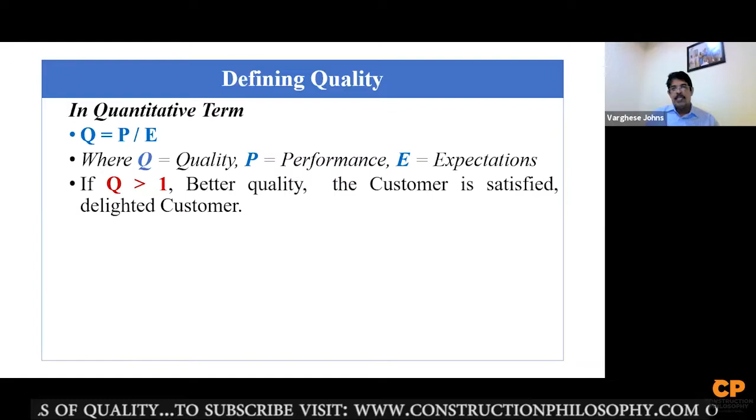In a quantitative term, this slide I showed last time also, just to remind everybody -- I'm showing it again -- the quantitative term Q is equal to P by E. Quality means performance over expectations. We can have a mathematical model defined like this way. So Q more than one means better quality, because your performance is always better than the expectation. And the other way, if quality is less than one, the customer is not satisfied. P and E are performance and expectation, determined by the organization and the customer.

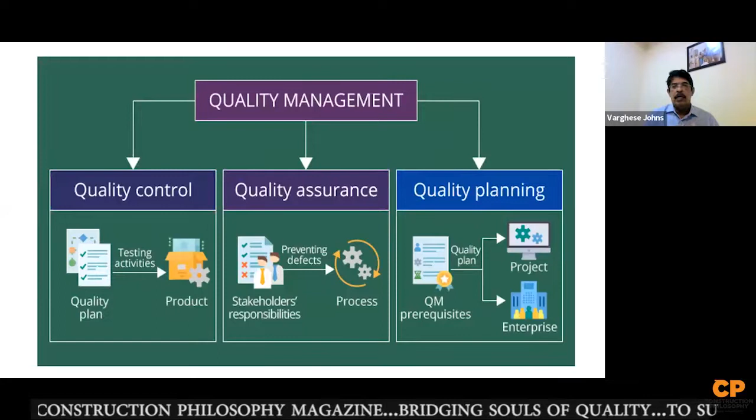If you say quality assurance, it is preventing defects. What is the objective of quality assurance? We set standards to eliminate defects. And who is responsible? The stakeholders -- the parties involved, the company, the subcontractors, the material provider, the consultant -- whoever is associated with a project, a process, or a service, is actually responsible for the quality assurance, because we form the quality assurance manual or the requirements.

When it comes to quality control, that is the testing activities. The quality plan is prepared already during the quality assurance stage, and then your testing activities, that is inspection, normally of the product or services, whatever it is.

In the 2015 quality assurance standard, it is not only product, it is services also. So when it comes to an organization or project quality management, once a construction company or a manufacturing company is awarded a project, you can see that half above is actually the client and the management of quality, how it should go.

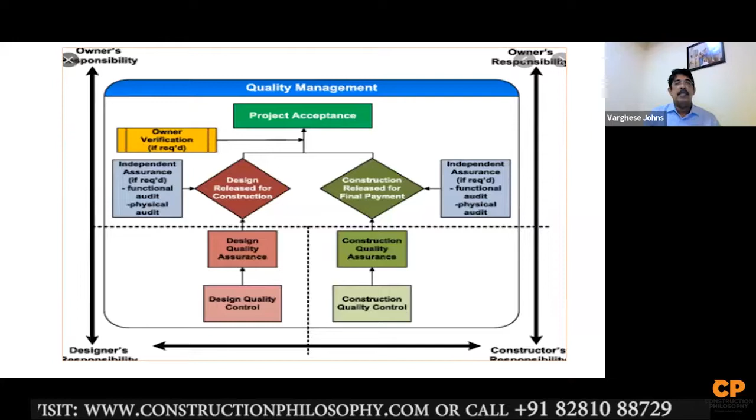They will appoint sometimes a third party quality assurance company to do the inspection and auditing time to time in the design stage, supported by another group. It will be another third party for design quality assurance and design quality control. Manuals and procedures are already formed that will be given to them. Then it goes to release for construction, then construction quality assurance, construction quality control.

There also, most of the time, a third party consultant is appointed, a specialist. Basically, they are more aware of how the quality system is implemented.

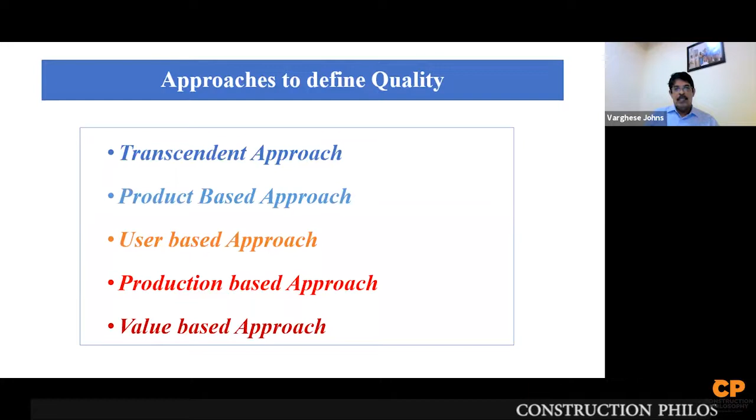Then approaches to quality. There are 5 types of approaches: transcendent approach, product-based approach, user-based approach, production-based approach, and value-based approach. These are the different types of approaches to define quality.

So let us see what is the transcendent approach. Quality is absolute and universally recognizable, because we always talk about quality every day, at least 10 times, because it is everywhere, quality exists, that is universally recognizable. The quality means when you see something, it's okay, it's a quality product. The sixth sense will give you a kind of clue that this is quality.

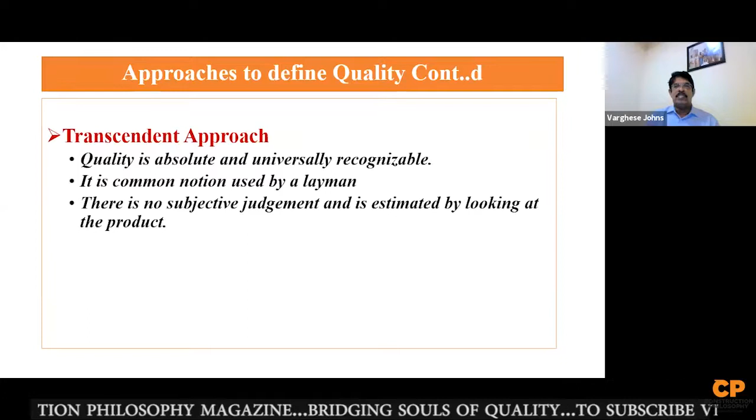And it is a common notion used by a layman, because everybody uses it. Every common person actually uses that, okay, it's quality stuff. There is no subjective judgment, and it is estimated by looking at the product, because it is not individual judgment, and anything which you cannot just estimate how much quality is this, it's always a comparison between one similar type to another similar type. But you don't need to be educated or more trained in making a judgment.

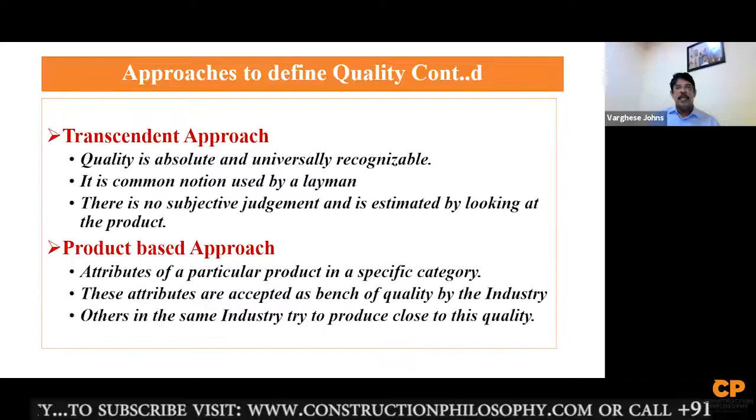Then product-based approach: attributes of a particular product in a specific category. Like manufacturing a car, the attributes of a particular product is a specific category. Because it's a car, it looks different in different models and different manufacturers, again, it's a car, but it looks different by different companies.

These attributes are accepted as a benchmark of quality by the industry. Even all the models, you can see that the quality is actually there, and each one has got a benchmark of quality for that product. Like you make a house, what is the basic function of a house? It will look different, but the basic functionality and other things are the same. So the benchmark for a house is rooms, living room, bedrooms, bathrooms—all that is the benchmark for a house, but it will have a quality difference in different ways.

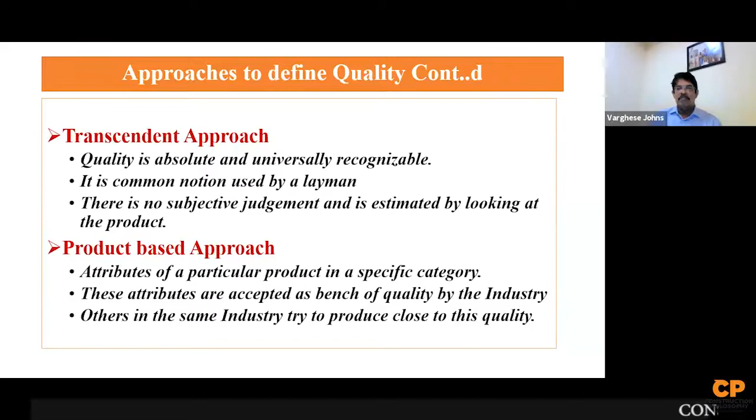Others in the same industry try to produce close to this quality. The same manufacturer or builder will make everything the same, but it will look different. And the quality is also actually maintained in making, but it's looking different, or maybe one quality is different, another quality is different, something like that.

Then user-based approach. User-based approach is defined as fitness for use, as we saw last time—fitness for purpose or use. A quality product is actually always fit for its purpose; that is basically the definition of quality. And it works, it gives you what you want, it is designed or manufactured for.

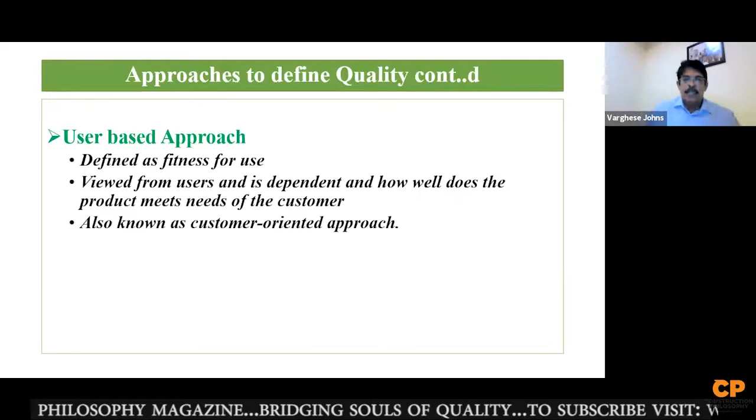Viewed from users, it is dependent on how well the product meets the needs of the customer. A customer always wants to buy something he wants, and he will give you certain specification requirements, and then he will look at the product or the process, or the end result. As a client, you will see that, oh, I want it this way, so that I am happy. The customer always expects it will serve certain functions, so that I am happy. This is also known as the customer-oriented approach.

Production-based approach: an outcome of engineering or operational excellence, and is measured in terms of quality or conformance.

If you are making a product, a house, or anything, the end of the day, you get some outcome, like you constructed your house or your project. So the operational excellence, if it is good and it is a quality thing, it is measured, the quality, or maybe the operational things are measured, and it is a quality or a conformance, conforming to what you wanted, or how it is functioning, how it is operating.

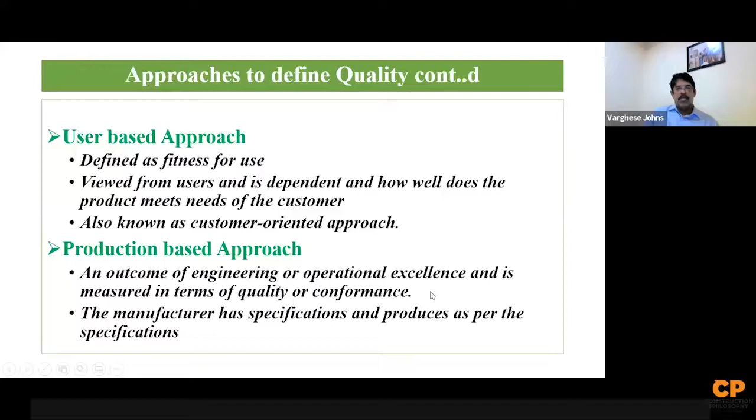The manufacturer has specifications and produces as per the specification. So there is always a specification set for a process, a product, or a construction. So you do it complying with the specification. That is also an approach of the production-based approach.

Then the value-based approach, values we see it in context of price. The same type of thing will not be the same price, but people spend money to buy sometimes bigger, expensive things, and they are happy and feel that it is a quality product. So it's a value-based approach, how you approach the product in terms of value.

Quality is satisfactory. It provides desired performance at an acceptable price. Sometimes people say, I got something for value for the money. So it is a satisfaction for each user, or the owner is going to have it.

Customer looks at the total value proposition and not the price alone. When you want to buy certain things, sometimes you like a certain product, but you don't give priority to price, or maybe you will sometimes sacrifice or compromise on the price. So it's a total value proposition - you buy it and say, okay, I don't mind paying for it. So value is equal to benefits over price. That is the same meaning as the definition we saw before.

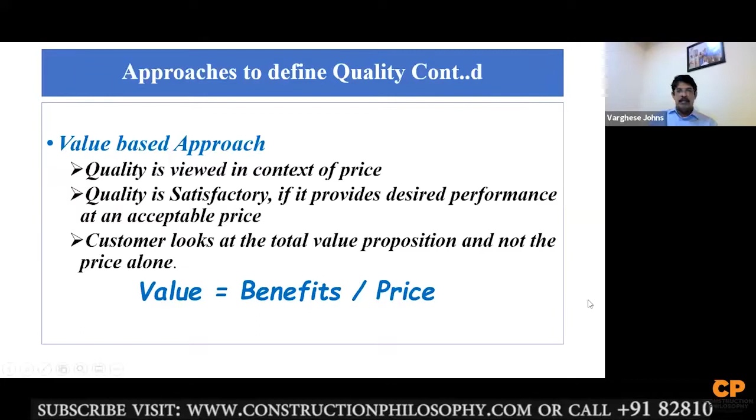Then the QAQC framework elements and manual, because every construction company's QAQC framework includes at least six elements. The following are the six elements you should include in your QAQC framework. This is a manual created by the company. Every organization will have this kind of manual. So what is the content of the manual: quality organization and management, the organizational structure of quality and management.

How you are actually doing, what is your plan for implementing quality - you need an organization, you need management, documented standards and specifications. So what is actually your reference, your benchmark to do the quality management? That is the standards - establish the standards as well as specifications. Sometimes the specification might change, it varies from project to project or product to product. But there has to be a manual which specifies this.

Formal qualifications and experience of employees - for a particular task, a structural engineer has to be employed for doing structural designs, so you cannot employ an environmental engineer for that. The right kind of talent has to be put in place. You have to document that these are the people going to engage in this particular kind of task or work. So you always employ the right kind of people with qualification and experience, because you cannot do a task without having enough experience on how it is done.

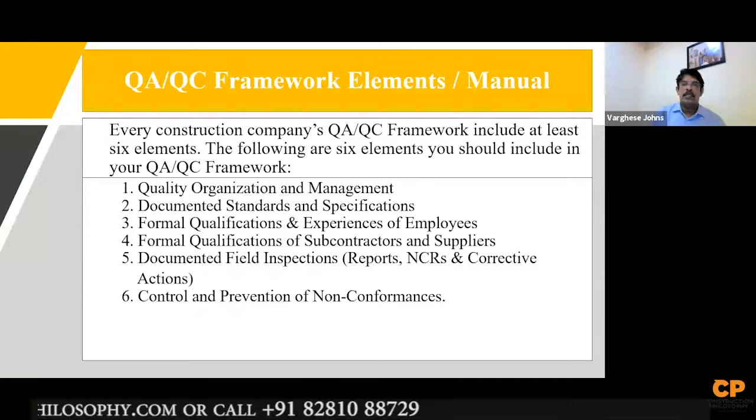Documented field inspections, reports, NCRs, and corrective actions. Quality control's function is to do field inspections and office and various department inspections. The process is also inspected using certain set standards and required specifications. So there are reports - how you prepare the reports - NCR, non-conformity reports, and corrective actions - what is the strategy for doing your corrective actions if you have an NCR.

Then control and prevention of non-conformance. The manual is actually created to state that - it is a proactive thing to prevent non-conformance, mistakes or errors.

So what you can do, because once you do many inspections of a project or a process, you will know by looking at it that these are the causes of this happening, so you can prevent it by having some kind of set procedure. Don't do it this way, do it that way, so that you get what you want.

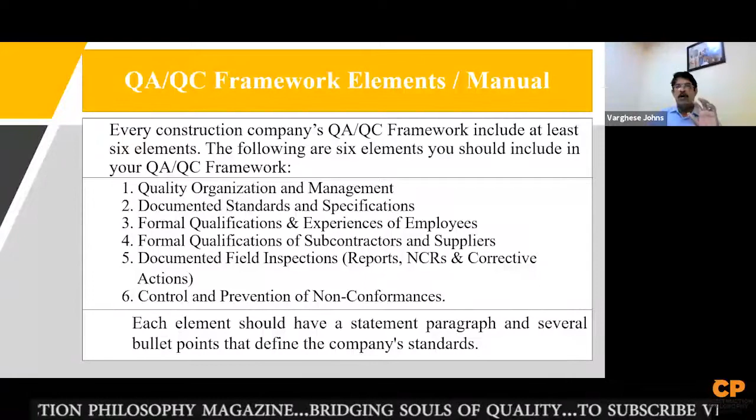Then each element should have a statement, paragraph, and bullet points that define the company standard, because it has to be prepared in a document kept for everybody to read and see what the framework elements of QA/QC are, and what manual the company wants - the policy of the company.

Then we come to comparing quality assurance and quality control. What is the meaning of quality assurance? It's a promise, belief, and confidence. Quality assurance is actually giving a kind of confidence to the people, or maybe the client or your customer, that we have a certain system established that will give - it is a promise, and that will improve the confidence of the buyer or the customer.

So here, quality control is to make or run in an order or within the limits. You have already given a promise, and your quality control people have to run in an order or within the limits specified in quality assurance.

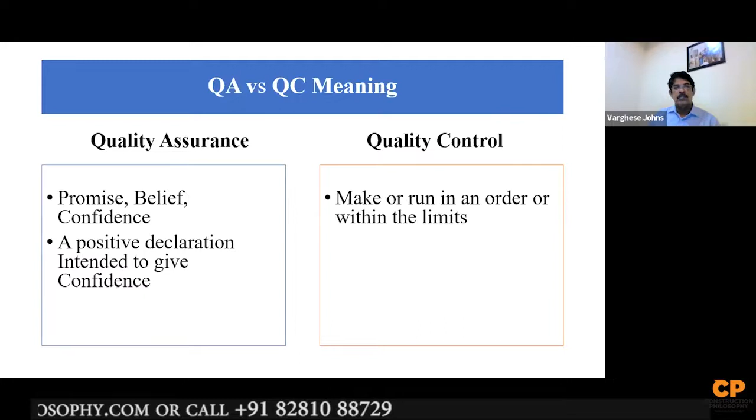A positive declaration intended to give confidence. You are giving a kind of positive declaration in advance that these are the things which we are going to give confidence on, because of this process or these procedures, which will definitely give confidence to the buyer or the customer.

So here, an ability to run something in an orderly way - because quality control is its ability to run within an orderly way, within the parameters specified in quality assurance, you are able to do it. That is what it means.

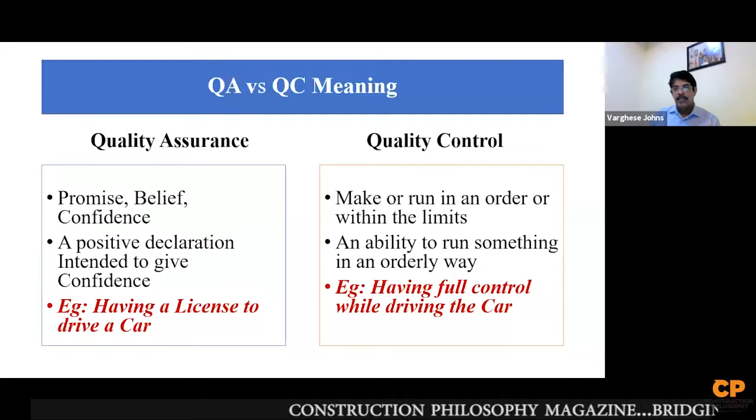So it is an example - what quality assurance means is having a license to drive a car. This is quality assurance, that you have gone for a test and got a license. But in quality control, it's having full control while driving the car. See the difference - that doesn't mean that even if you have the quality assurance, how do you drive the car? Can you believe, or can you do, the entire control of the car while driving? So that is the difference, explained in a small way.

So now the QA versus QC definition. What is actually QA, quality assurance? A part of quality management focused on providing confidence that quality requirements will be fulfilled - a quality management system, that is the basic content, same as giving confidence to the buyer. A part of quality management on fulfilling quality requirements. Here it is fulfilling, and there it is telling that these are the things which give confidence. And here you have to make sure that it is fulfilled.

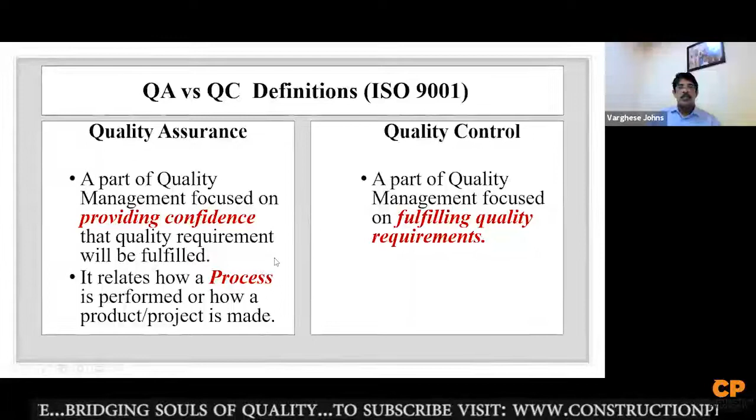So it relates to how a process is being performed, because quality assurance is a process, defining a process of how it should be. And a product or project is made - what processes you have to do to achieve or complete a product or project. So here it is more the inspection aspect of the product based on the quality management system, what you have said in quality assurance. Here it is process, and quality control is inspection, making sure that you have complied with what you have already established.

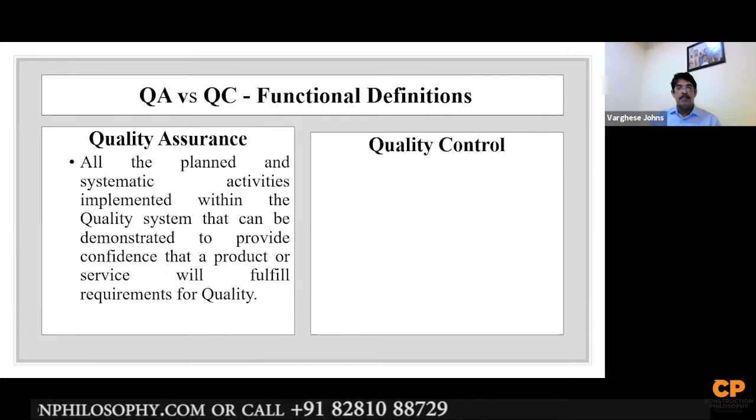Then functional definitions - that is all the planned and systematic activities implemented within the quality system that can be demonstrated to provide confidence that a product or service will fulfill requirements for quality. So overall, you will see that it is fulfilling everything you have said in the quality assurance manual or system, that can be demonstrated to provide that confidence.

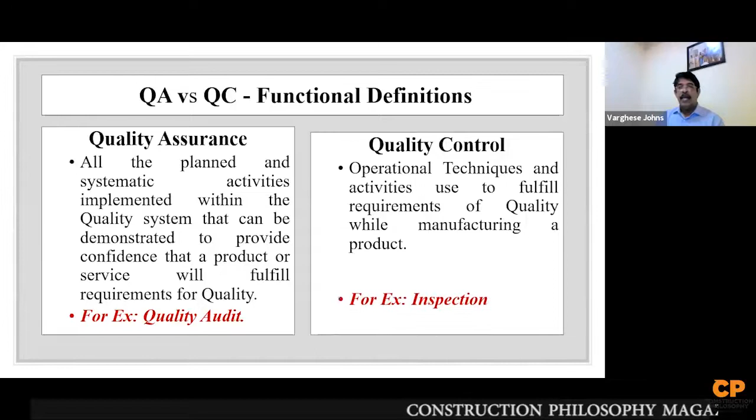Here, operational techniques and activities used to fulfill requirements of quality while manufacturing a product. So the techniques - here it is a process, and here it is operational techniques, which is an inspection. You make sure that what you have said, declared, or established is actually being achieved, and you do an inspection so that the technique of operation is leading to get what is actually spelled out in the quality assurance confidence quality manual. So it is quality audit here, and here it is inspection.

Then, evolution of QA versus QC. Quality assurance actually started in 1950. Quality control started in the 1920s, because you know the importance of that period - around 1918-20 was the First World War.

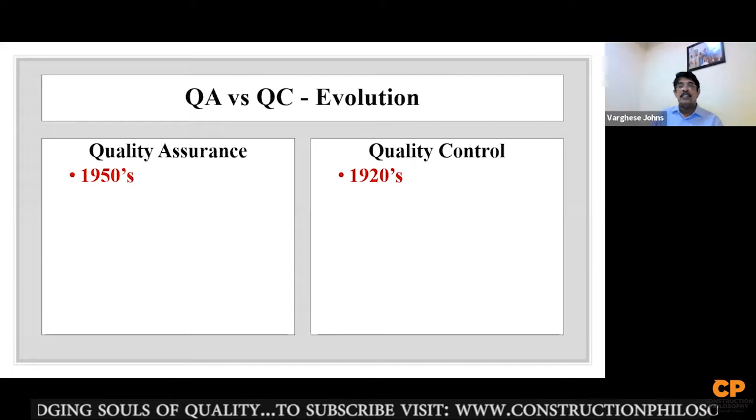When the First World War happened, machines started manufacturing, and a lot of machinery was required to combat the war. So many companies like Ford came up. Ford was one of the oldest companies, an American car company, but they were not doing manufacturing of cars, they were manufacturing machines to help the war. At that time they started wanting to check how their products were actually coming out. That's why quality control started, but there wasn't any established philosophy at that time.

It started later, so the quality profession expanded to include quality assurance and quality audit functions. Following the industrial revolution, there was a rise in mass production, so quality control is more used in that area. In mass production, you produce say 10 items and you see out of 10 how many are good. So you need a kind of inspection required. That is how it started long time back.

There is actually a story behind it, inherited by Ford Motor Company. Ford Motor Company started manufacturing automobiles just after the 1920s or 25 or something like that. They are the people in the world who established assembly lines. An assembly line is continuously manufacturing the same item on a conveyor, so that each section does their part and it keeps moving along, and once it reaches the end of the conveyor assembly, you see a car altogether.

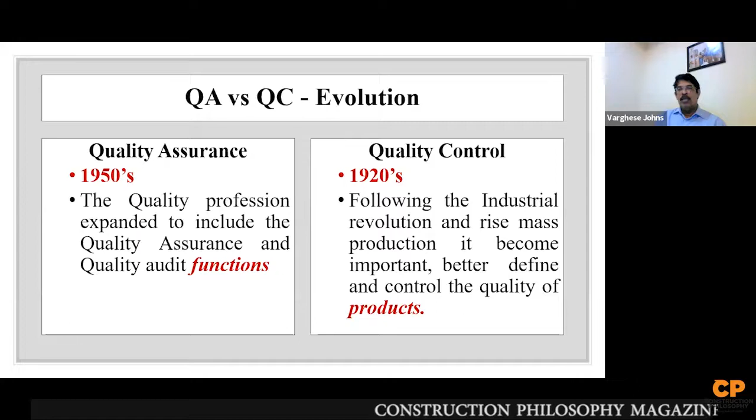There is a man called Ransom E. Olds. What he actually did was a little experiment. He called 3 people and asked them to make paper clips, giving them the necessary tools. They had to cut a piece from a coil of steel wire and then bend it. After a couple of days, he went and asked how many pieces they had made, and they said around 150 pieces.

Then he changed the philosophy. With the 3 people, he assigned one for cutting the steel wire, the second for bending it, and the third for making it into a hook. So the 3 people started doing 3 different activities in a system, rather than one man doing everything. After a couple of days, he checked again and they had made around 500. This is where the philosophy evolved: mass production and assembly lines, with specialized sections where expert people engage in tasks so they can do it faster than doing everything together.

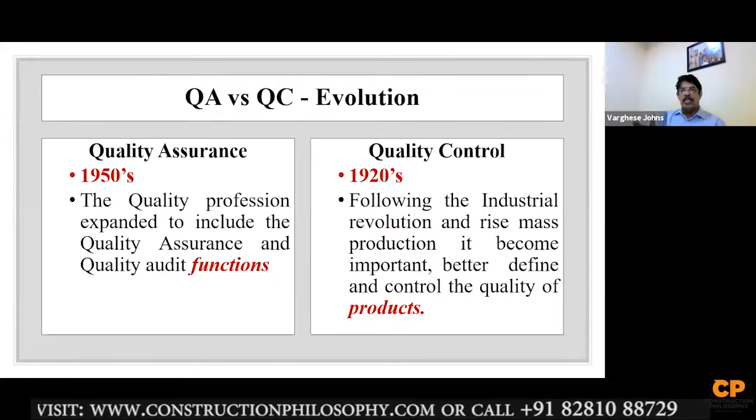There were a lot of people who used their intelligence in developing these kinds of things. Quality control was also there to look after the product and other things, because this philosophy had started and people began thinking along these lines.

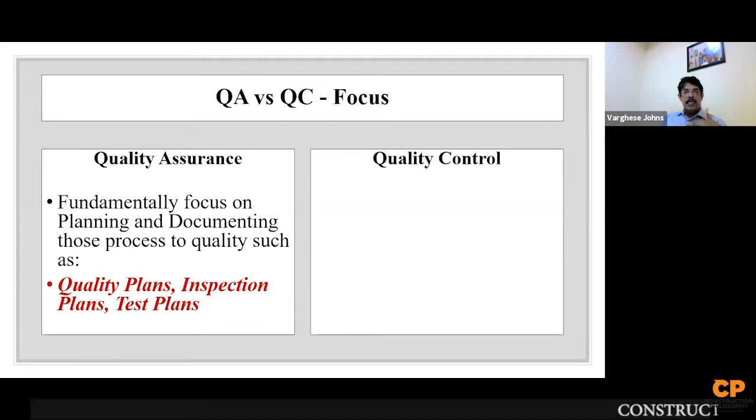Now let's focus on quality assurance. What is the focus on quality assurance? Fundamentally it focuses on planning and documenting the process to quality, such as quality plans, inspection plans, and test plans. In a quality assurance department, whether in a construction company or a manufacturing unit, they prepare a planning and documenting document which includes quality plans, inspection plans, and test plans. These define what inspections should be carried out, which areas you should inspect, what the estimated or required quality levels are, which areas you will test, and what materials you will test, because you cannot find the mechanical or chemical strength through inspection alone, unless you do a test.

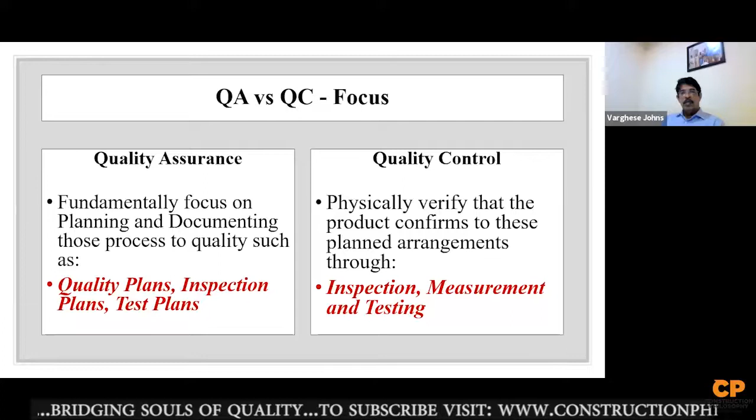Like a welding process, you need testing; visual acceptance sometimes doesn't give you the clear picture. So quality control is where you physically verify the product conforms to the planned arrangements. In quality assurance you already have a quality plan, inspection plan, and test plan. In quality control, you physically verify what you've defined through inspection, measurement, and testing. So you make an inspection plan, do measurement to see that it is correct, and then do testing according to the test plan. This is how it is actually done.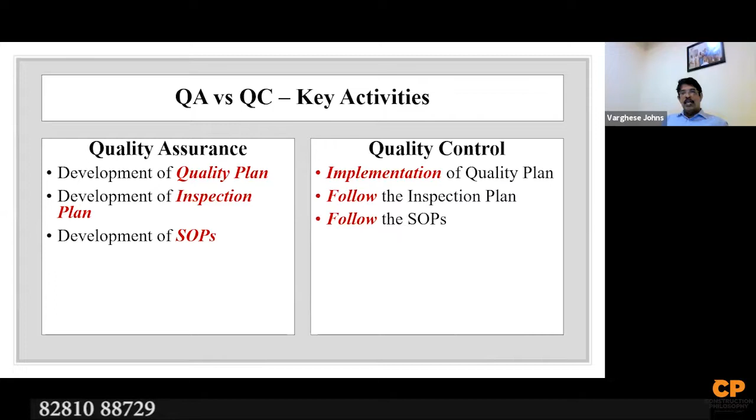So the key activities of quality assurance and quality control: development of quality plan, implementation of quality plan in quality control. Here, development of inspection plan, follow the inspection plan, so you do the activity here. Then development of SOP, standard operating procedures. Follow the SOP, you make sure that your report says you are following the standard SOP set by the quality assurance part.

Evaluation of quality system through audits, because this is actually a brainstorming thing, you come up with quality systems, and from the experience you keep auditing it, improving it. Some systems are established, and after doing some inspection you found there is some problem, so you keep changing it. It has to be audited time to time.

Control the quality of products through inspection, so the set standards need to be seen. Then preparation of documents for QMS, quality management system, in quality assurance, and implementation of QMS as per documentation. So one is the philosophical thing which is developing, and the other is implementation by practical means.

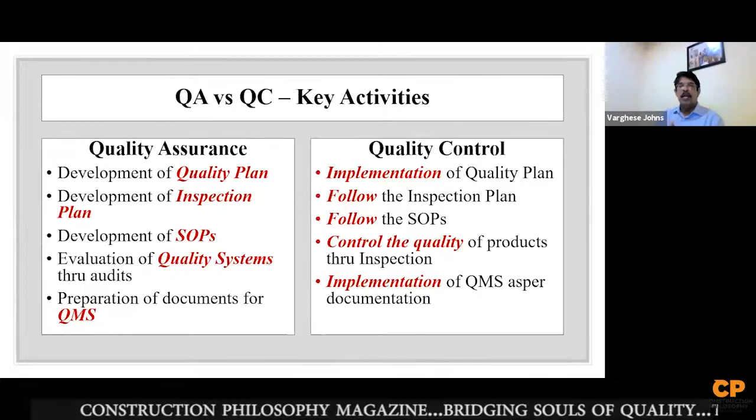So the objective of quality assurance and quality control is to prioritize the customer requirement and translate them with the help of the engineering team into technical requirements for product development. That is quality function deployment, QFD.

What does QFD mean? Suppose you want to build a house. You go to an architect and tell him that I need a 3-bedroom house, and my budget is this. So this architect will come with a kind of plan and everything, because whatever you told them, that is the definition you gave to an architect, that this is what I want. And he will translate your idea into an engineering concept. It can be a construction, a product, or a process, whatever it is. Whatever the idea is, converting it into an engineering concept is called quality function deployment.

It's a big chapter actually. If you go through it, you can see there is a lot to learn about quality function deployment.

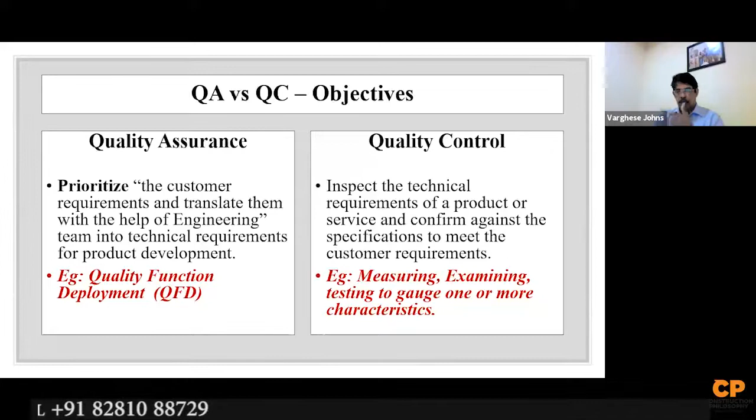Then quality control is to inspect the technical requirement of a product or services and confirm against the specifications to meet the customer requirement. So you have already established what the customer requirements are, and quality control will confirm that this requirement is actually being met by measuring, examining, testing to gauge one or more characteristics. This is the practical thing, inspection related thing. So you do that, that is the objective.

So QA versus QC, what they do. Quality assurance is prevention of quality problems through planned and systematic activities, including documentation. In a quality system, one of the most important things is documentation. Whatever you feel, whatever you write, whatever you do, it needs to be documented. Documentation is one of the most important parts of quality assurance and quality control.

Whatever you do, here it is SOP, standard operating procedures, written as a manual that you keep, inspection plan, how you do your inspection, control plan and quality plan. So here what you do is achieve and maintain the quality of products, processes and services using activities and techniques. For example, 100% inspection measurements. Sometimes how do you define whether you need 100% inspection?

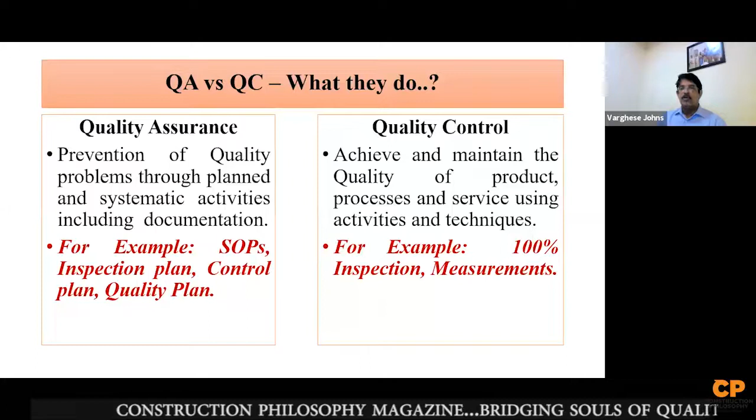You cannot do, suppose you have done a welding of a tank, you don't normally do 100% inspection, it will take ages to complete it. So you define in the quality assurance manual that only I need to do 5 to 10%, and then you locate. So whether you require 100% inspection or partial inspection depends, and that will give you a kind of control, and the quality plan will define it based on experience earlier. The documentation, that's what I said, documentation references from previous jobs.

Then how they do it: establish a good quality management system and the assessment of its adequacy and conformance, audit operation system, and the review of the system itself - product audit, process audit, and system audit. So you continuously do an audit of the product and your process, how you are making that product, and the system including everything, so that you audit whether it is right or wrong. So that is the quality assurance you will provide.

Here, finding and eliminating the cause of quality problems. So once you have the audit, you will know what the problems are, the causes of the quality problem by finding it, and then you want to eliminate it. So for that, you have to do this kind of analysis, for example, why analysis.

There is something called why analysis, 5 whys, cause and effect diagram, which we have seen last time in 7 tools - cause and effect diagram, that is a fishbone diagram, what is and what is not, etc. So things of this kind, the questions, when you sit and discuss with all managers or lead people, then you come up with questions regarding quality problems.

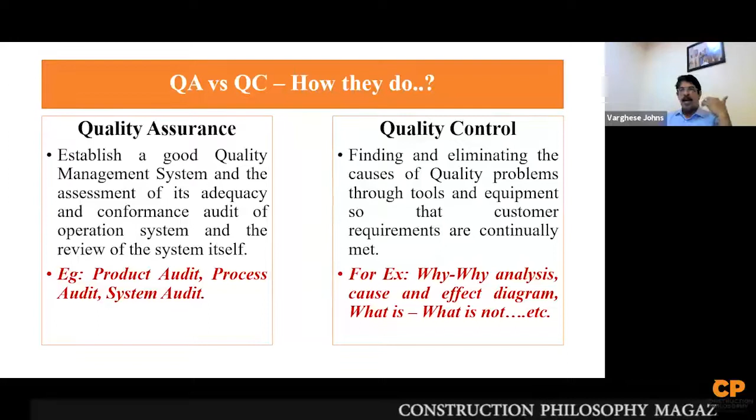And you have already got data and found, by doing QC, how you eliminate it. Because quality elimination, that is another tool called lean, elimination of errors or defects. So that is another tool. We will have another session later about all those tools.

Defect control, that is prediction of potential defects, right from the product development process design. This is because it's potential defects, like we anticipate some defects at certain points of the operation. Then categorization of defects - one will have a welding problem, other will have a bending problem, a material problem or straightness problem.

So you categorize it and see whether it is critical, major or minor. Minor means you can absorb it, you don't need any rectification. Major means, and critical means, it will affect very badly your process or maybe your product.

Establish a quality system that prevents the occurrence of defects. So that is mainly why you put all these things, to prevent the occurrence of a defect. So that is what basically it is.

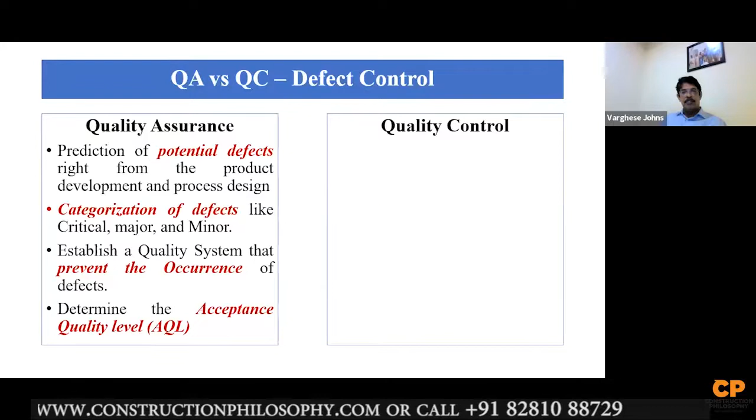Determine the acceptance quality level. What is the acceptance quality level? That also we have seen previously, the Six Sigma, and also we did the mapping of the defects or maybe the variations. In a straight line, we want the variation should not exceed certain limits. So that is the acceptance quality level, used by standard deviation. You can find out what is the acceptable level based on the quality requirement of that product.

So identify the defects and defect sheets through in-process inspection. So like the quality control system identifies it. So here it is potential defects.

And then sorting of defective parts of 100% inspection. Some products may require you to do a 100% inspection. Suppose you have a damaged concrete column, or maybe 2-3 columns, one may require 100% inspection of your cover, your reinforcement, and all those things. You are spelling out which one you will sort out and group. How many you should do preliminary, less inspection, say 20% inspection, and another one you need 100%.

So implement an inspection plan, which you have already prepared here, to escape defective parts, and in final inspection as per acceptance quality level.

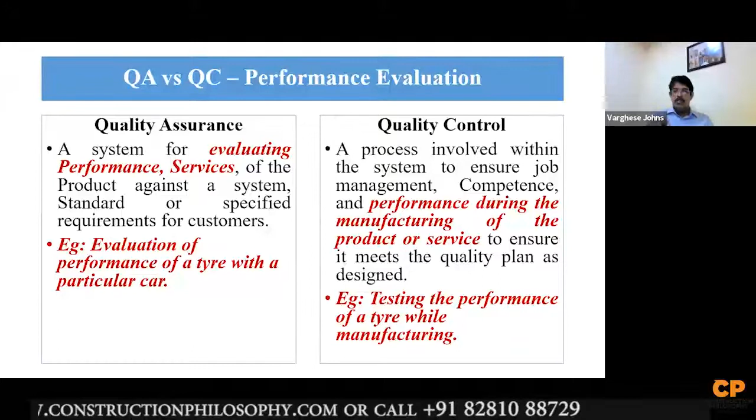And here it is actually the process involved with job management, competence, and performance during manufacturing of the product or service. Here it is that the tire is actually, while manufacturing, checked whether it is done according to the design, specifications, and all.

So that is a difference between quality assurance and quality control in that particular case, because the evaluation gives you an idea that maybe you will find some reason to improve the quality of the tire by doing something. So you can do a study.

Similarly, it's an example - everything you can do with any product, you can see how long it performs without any defect or maybe failure. So that is the performance evaluation you do based on QA and QC.

So as a tool of quality, it's a way of management, a complete system to assure the quality of the product or service. It is not only a process, but a complete system, including control. So here it's a process itself - here it is management and it's a process.

Just measure and determine the quality level of products or services, because you have an inspection procedure. You will see physically, you measure the quality - what is the quality against your benchmark or template. That is actually quality assurance established specifications or requirements. So that is the quality assurance part.

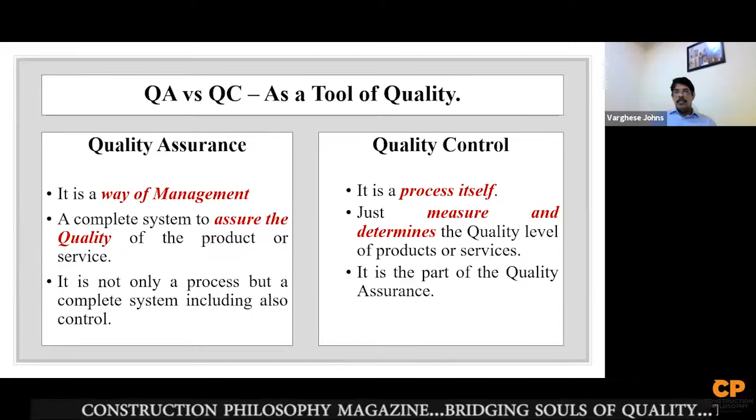You see the overview - what we can say, it's quality assurance here, then it's a product. Then it is a proactive thing in quality assurance; here it is a reactive thing. Then staff function, because management or senior people are producing it, and here it's a line function because it is in the operations, construction, or manufacturing - it's a line function. Then 7 management tools or QC tools, like the ones which we have learned before.

Last session we actually did the 7 QC tools, but this is 7 management tools, which is a little different - it's a new one. The 7 QC tools are based on quality control, because you will use them in establishing your studies or your quality assurance system and quality control, how you will find your defects and provide a solution for that. That is where these tools are used.

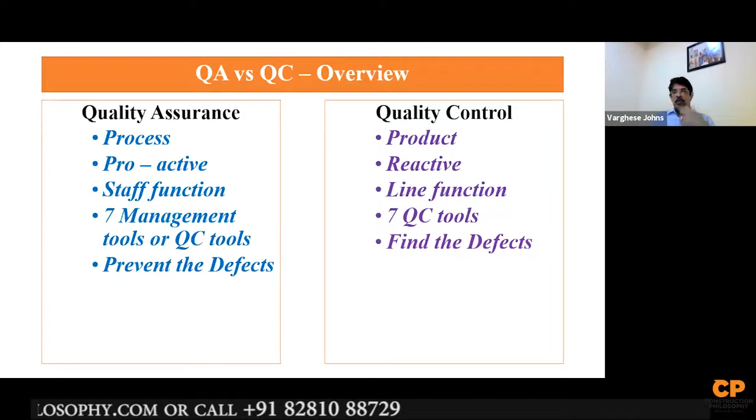Prevent the defects, find the defects - prevent it in advance. You say that if you do like this, maybe you will prevent it. Then in manufacturing, you are finding the defect - how many are defective. Quality audit, walkthrough.

Here a quality audit you will do for the assurance philosophy. Here it is a walkthrough - you walk around and see how your quality is working in your system, your process, and your construction, whatever it is. Defining the process here.

Then here it is testing, because some elements of your manufacturing require testing. Maybe you have to test your reinforcement while you're doing it, if you have a doubt, a third party laboratory is actually called to do the testing, because many times you don't have the documentation available. The manufacturer has not given the required chemical or physical characteristics or the grade or all those things. So you do testing sometimes if it is very critical.

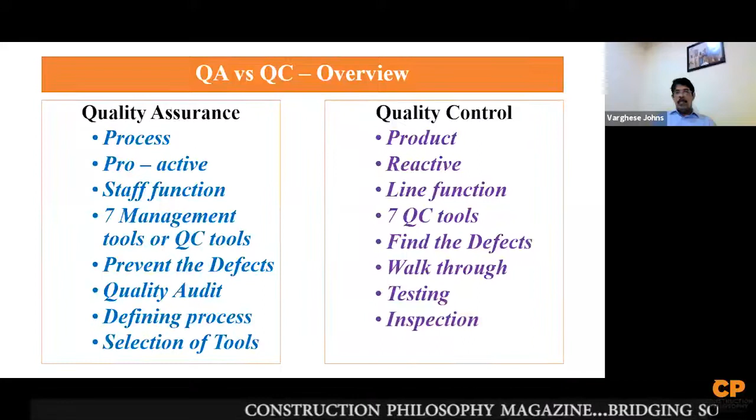Selection of tools - which tool you will use to implement your quality control, your inspection. That is how the comparative study, or maybe as per this.

This is how to implement QAQC, which we have seen last time also - phase 1, phase 2, phase 3, phase 4. The first phase is definition of procedures and tools for quality control. Implementation of procedures and tools. First is the definition, and second is the implementation.

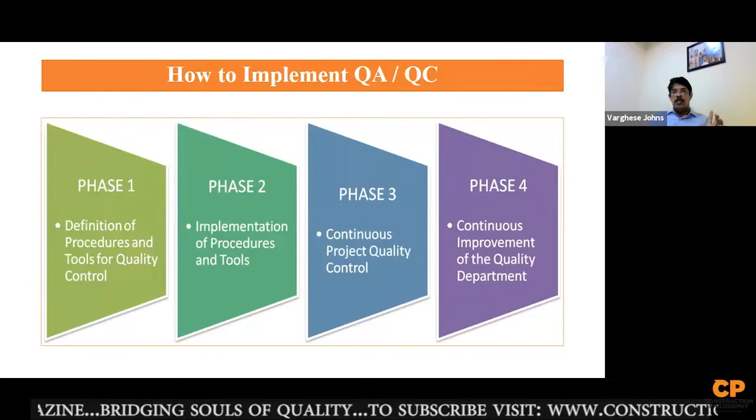Third is the continuous project quality control. So quality control is not a process for a short period - it is a continuous thing. It keeps on happening, because quality is continuous - we will have a next presentation on continuous improvement, continual improvement, and rapid improvement. That is also part of quality, how you do it. It's never ending, it's always continuous.

Then phase 4, continuous improvement of the quality department, because the quality department is always looking at how to improve your quality, your product, because you cannot just get stagnant there - you always have a competitor bringing out a better product than what you are doing. So your quality improvement is always a process, and you need to improve all the time, because your competitor will give you a setback if you don't do it.

Then what are the different documents or areas where you are doing inspection - during procurement, fabrication, and construction. QAQC expediting - you will expedite what is actually QAQC. Engineering and design control is a QAP, quality assurance plan. Then procurement, material spec control and inspection procedures, checklists - these are all there, and you will develop it.

Waste optimization and control - this waste is actually lean, Six Sigma. There are 8 types of waste that we will cover in a session later. So how you will optimize this waste - time waste, process waste, effective waste, and so many things - and then how you control it.

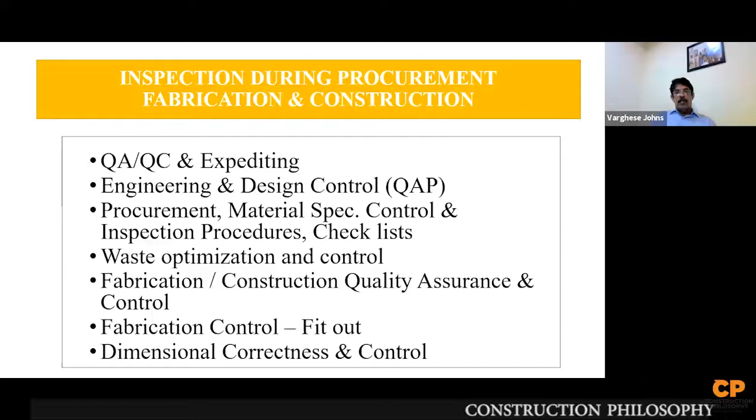Fabrication, construction, quality assurance and control. So if you have a fabrication factory or a company, then you will have to have a quality assurance plan, fabrication control fit-out, because the process of fabrication is that you have the material, then you have the fabricator who will put it according to the drawing, and you will check whether the dimensions are correctly fitted out. Then you go to the welding permanent.

Then dimensional correctness and control - you check all the dimensions on the basis of drawings and specification, the right kind of material is used, the right kind of welding procedures are met, you don't have any issues - that is what the process will do. Like welders and welding procedure certification, you will not allow normal welders - it is certified welders at different levels, 1G to 6G, there are certification levels, 1G, 2G, 3G, like that.

This is using non-destructive testing methods. There are so many non-destructive testing procedures. This is bridge NDT testing procedures mainly established by railways in India. There are very advanced level resonance kind of things, because electrical signals are passed through reinforcement to see that their integrity is good. So there's a lot of NDT procedures now to study.

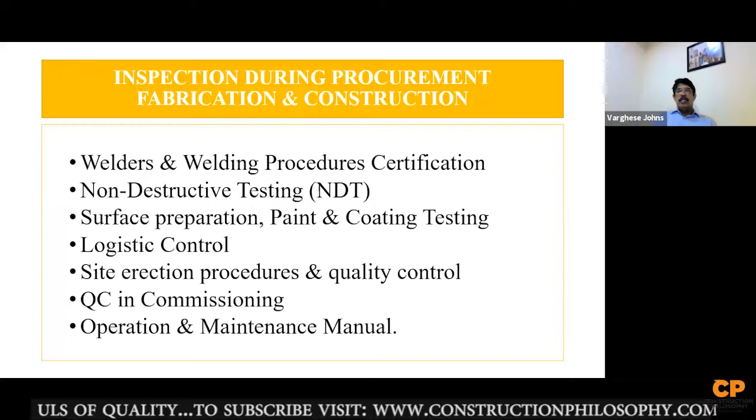So then there's the operation and maintenance manual. You give how to operate it and how periodically you do maintenance. There's a manual actually given for every car when you buy it - when you want to take it to maintenance or servicing, what you will check, all those things. So these are the kinds of inspection in construction areas, manufacturing or products.

This is human resources - how will you do quality control. If you want to hire somebody, you should have a job description, candidate selection, probation reviews, and then performance evaluation, promotion, remunerations and things - 6-monthly interactive performance evaluation, recognition, feedback and advancement. These are all procedures established by each company based on ISO. There's a lot of guidelines.

It varies from time, but in content as a basis, they're the same. So in sales and marketing, it's sales versus quality thinking - a sales department or marketing department always says, how much money can I make off this deal? You got a job, you signed a contract, immediately sales people think about how much money will come in.

But that is not the way it should be. The quality thinking is, when you have a job, what is the lifetime value of my customer? I'm going to get repeated orders - how long is this customer going to be with me? That is the quality thinking. If you do a bad job, you cannot keep him lifelong, and the repeated order will not come. So that is the way it should be thinking in sales and marketing - the objective of the sales department should think in that way.

The estimation and costing - this is one of the biggest prioritized areas of an organization, how you keep quality control in estimation and costing. In estimation and costing you always need resources, and you start putting cost on resources. So you have to plan the resource organizational structure, who are all going to be there - a project manager, project engineers.

So many people will be required to run a project. This is resources planning, with people, equipment - you need equipment, materials needed for project completion. Then cost estimation - develop an estimation of overall cost of resources needed to complete the project, based on resource allocation of people, equipment, material, and duration. So you put a cost analysis to find how much it is going to cost.

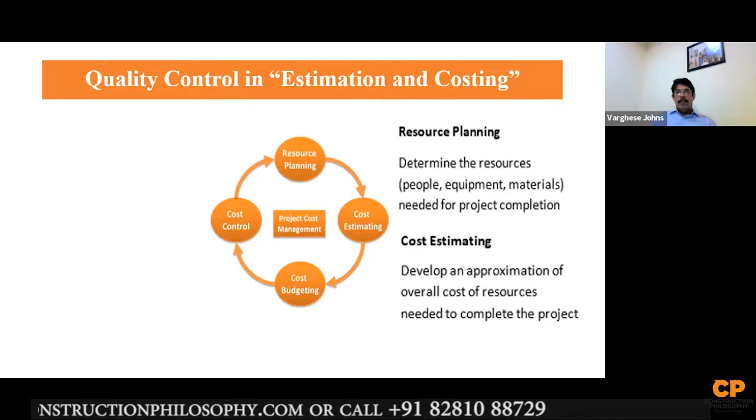Then the other one is cost budgeting, because when you have a job, you have various activities in a project.

Like you have to buy material, you have to do engineering, you have to do construction, your office, HR, administration, quality, and all those departments. And at the end, you will see profit. So you have to give a certain allocation of budget to each department, each function.

That is called the baseline, then you check against the baseline. So you put, okay, 50% I am allocating for the project materials. So you keep controlling it. The project manager's job is to see how much money, and you check against the progress of the work and the material, the money consumed.

That is something which I don't know whether you must be knowing, the earned value management. So that we will do later. Earned value management is another technique where you study the project process and see how you control your project in terms of money and time.

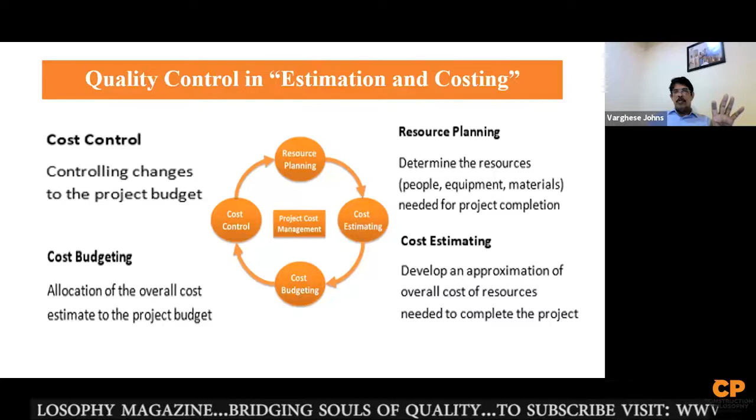So cost control is about controlling changes to the project budget, because you cannot keep increasing your budget for each department. That will go beyond your 100% and you are in loss. So how do you manage it? This is how the quality control system works, for estimation and costing.

Why does this actually go wrong? Then there's false benchmarking. Your estimation is sometimes not correct. You think about something old, your assumptions are wrong, and you do it. That is false benchmarking. It means you take a price or cost from a false level, or you don't know exactly how much it is going, you just assume it.

And assumptions, man's assumption is another man's opportunity to make money. Definitely, if I make an assumption, it's another man's opportunity to make money, because if I make a false or wrong assumption, somebody will make money out of it, a benefit.

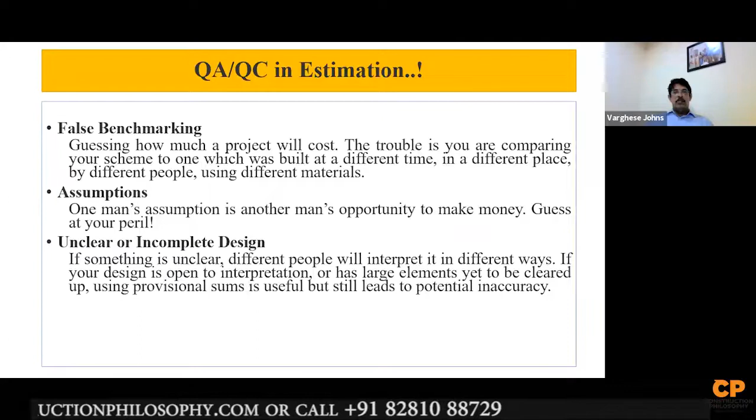Unclear or incomplete design. Design is one of the major issues when your estimation can go wrong. That's why everyone says that if you do the project and the design is correct, your project is successful. That kind of acronym exists, because people always say that. Then time and the program, your scheduling and planning also sometimes cause a bit of cost overrun as well as project failure.

So these are all elements of quality control and quality assurance, because you have to put your effort into controlling things in a better, transparent, and value-based way, knowledge has to be applied. So QA/QC will help in doing that.

So the estimation methods are there. There are a lot of estimation methods, different types of estimates people do. We can start from quick and dirty to high accuracy and detail. If you see the graph, there's expert judgment, 3-point estimate, comparative or analogous estimate, parametric estimate, and bottom-up estimate. If you want a very high accurate estimation, then you go for bottom-up estimation.

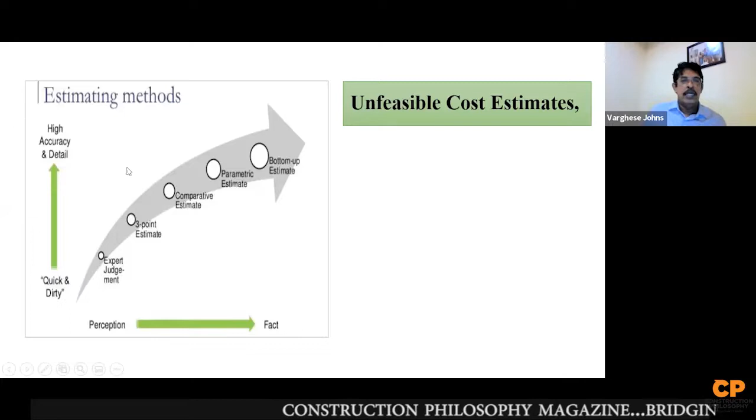That is based on preliminary design, drawings, and other things, because the first ones are assumptions made. A 3-point estimate is actually based on 3 people or 3 values. You collect it and take the mean. That is why it is called a 3-point estimate, because you must have done so many projects and you take certain values from 3 projects and then average it.

That's a 3-point estimate. So comparative is actually called analogous as well. It is the same thing where you use your assumptions as well as basic drawings, so the accuracy level will improve there. So cost estimation is an important process in a project for keeping your quality and other things better.

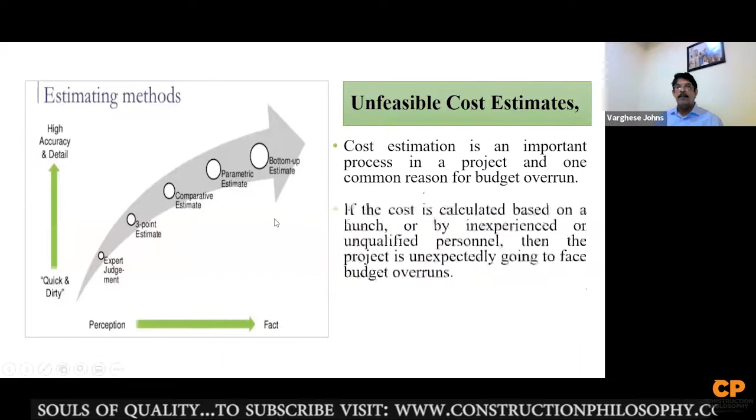The cost is calculated based on a hunch, but it's from somewhere, I have a hunch that this much is the price. So a very experienced project manager can give a good clue, he will have a good hunch about how much it will cost. Otherwise not. This might look fine in the earlier stages of the project but often look unrealistic at later stages. That is what mostly happens. At the beginning, everything is in control, then later you overrun your cost, so you need to do stage by stage auditing.

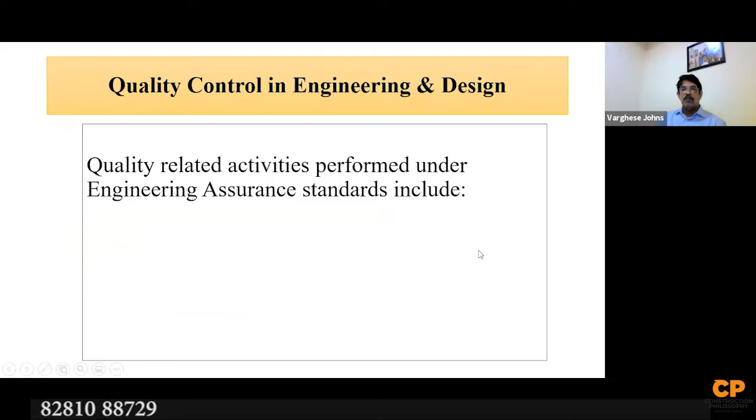Then quality control in engineering and design, this is one of the most important, maybe the maximum attention you should focus on doing engineering and design. Quality related activities performed under engineering assurance standard include QAP, the quality assurance plan, which defines independent checking of documents, interdisciplinary or interfunctional review of documents, and independent engineering design reviews, because you do design analysis and design first, then prepare your documents, drawings, and BOQs and things like that.

You have to do engineering and design reviews because you make a lot of assumptions when you start doing a design. How do you know that your assumptions are within limits, or working, or sufficient? Whether it is guided by codes and standards, are you verified with it? Somebody has to check it, that's what a review has to be done.

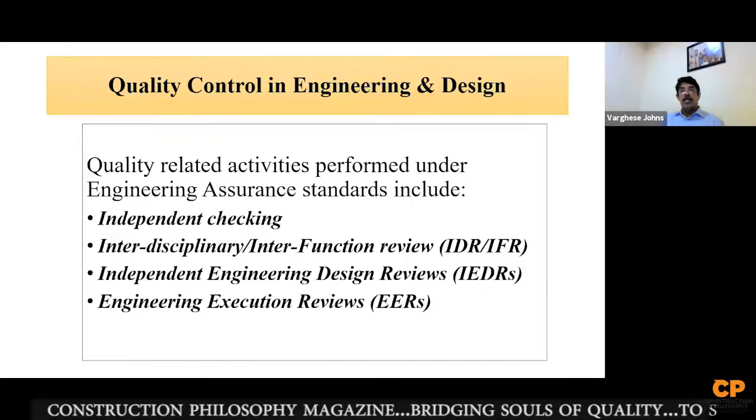Then engineering execution reviews - the engineering department will prepare a certain execution process that also has to be reviewed: the selected technical review, scope, design basis, engineering analysis, design, detailing, drawings, BOQ, specifications, and documents. So an independent engineering and design review always covers these areas - design basis, engineering analysis, everywhere.

Have you made the right figures you use for doing the analysis? Things like that. Then assure consistent quality in engineering assumptions, drawing presentation, scaling - how do you present your drawing? The drawing has to be checked - the format, the content, the presentation of the drawing.

Whether it is readable or the scaling is right, and is it in accordance with the design, what is actually the design output? You cross-check it - the number of bars or the size of the beam, is it correct as per the design or not?

This is the information or conformity with design output, because you have to be very careful. Normally when you review a drawing, you review it in three different ways. One is the presentation, one is the information level, because your drawing should have sufficient information for somebody to execute. A drawing is issued to the site, and if he doesn't have all the information available, some dimensions are missing, he cannot do it. So that cannot happen - that is why this information checking is required.

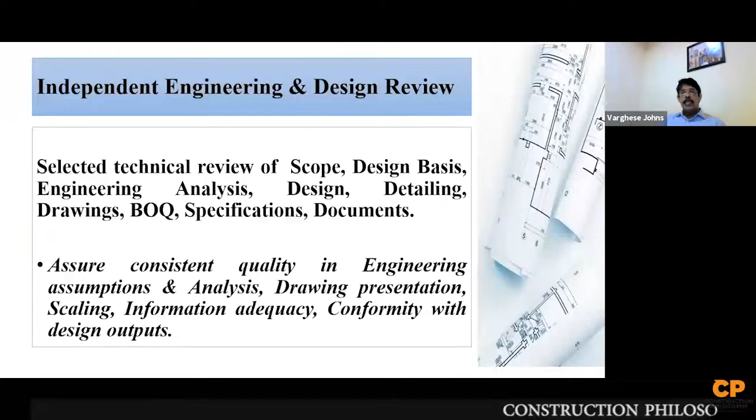So that is information level, and then conformity with the design output. All your size of bars, beams, everything - the design, what is actually provided, the details is in line with your design output, what is shown on the drawing.

So completeness of details and documents, this is what I was talking about. Consistency with company, client policies and procedures - the company will always have certain policies for how we do it.

For major projects, you will prepare a design basis which includes codes, standards, and good engineering practices. Focus on complex and high-risk elements of the design scope - where are the major areas where you should pay attention in designing, because that could be a fatal location for collapse or failure. That has to be understood from the geometry you receive.

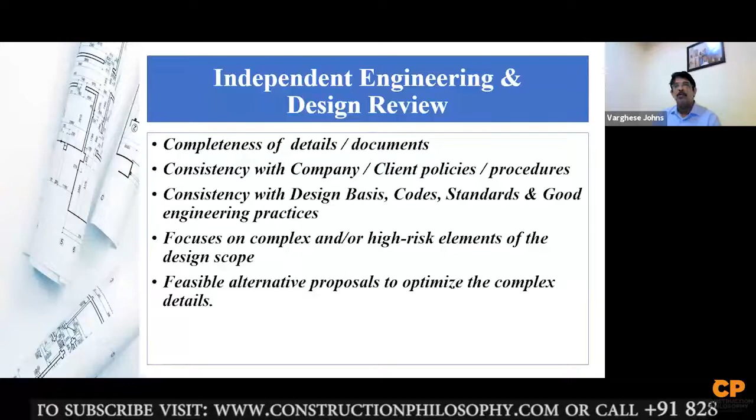Then feasible alternative proposals to optimize complex details - if you found something that is not constructible, you will do a value engineering and constructability review and find out there is a problem and you cannot do it. Then as an expert, most contractors will do an alternative proposal to the client or consultant, saying this way you can do it, more constructible and maintainable.

Formal process documented IDR - this is the engineering. All these things have to be documented in a formal way so that you can retrieve them later, even if you are giving a warranty, or if somebody else wants to review it for some problems, you should have proper documentation of all these things.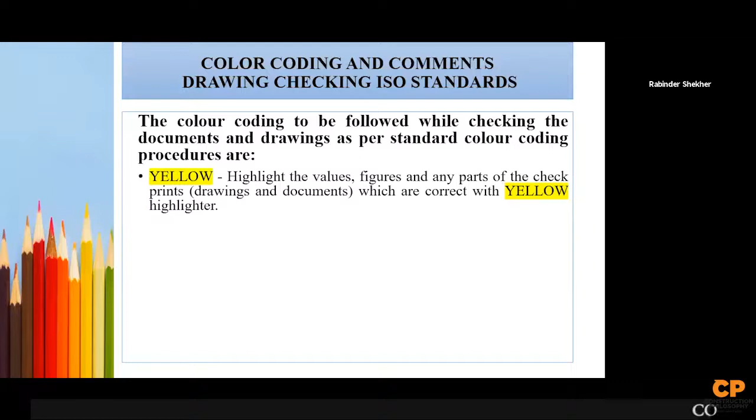Then another thing is how you check your drawings using color coding. Yellow means check prints which are correct, marked with yellow highlighter. Blue highlights values or figures which are not required - sometimes your drawing will have things which are not necessary, so you mark it with blue.

Red is actually for corrections and changes - you cut it and mark it with red, saying this is not right, you have to change it. And pink highlights the values, figures, and parts of check prints, drawings, and documents which are corrected based on the above, because you asked them to remove or correct it.

So later you want to make sure the comments are incorporated - how do you make sure the current comments are incorporated in the drawing? That is where you use pink. Once your drawings are ready, based on all this correction and checking, you keep it in the documentation and make the final print. The final print is actually checked.

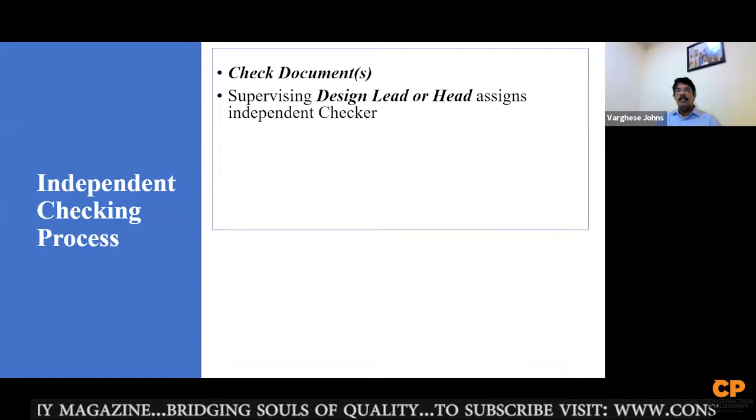Somebody will check it, a supervising lead or head will implement the checker. It is an independent guy, QAQC engineer or somebody. The checker will do adequacy, drawing layout, format, requirements, and so on. Then after that you put a check print stamp, and note who checked it and who back-checked or approved it on the drawing. Then you put the issued for construction, IFC drawing, or issued for good for construction stamp, and issue it.

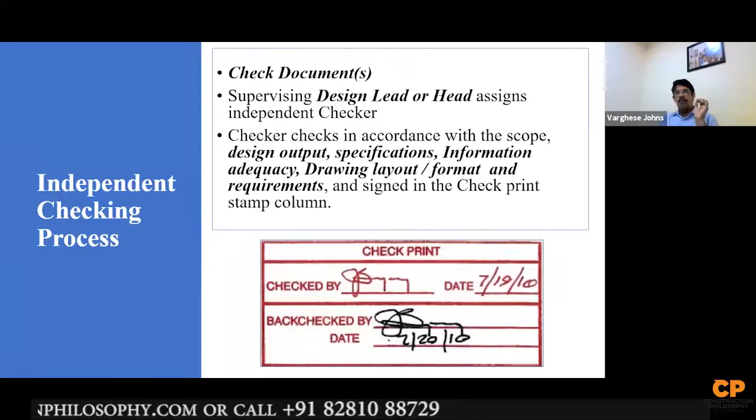So these are the processes you do for a quality plan, QAP, quality assurance plan for engineering and design. Normally a contractor is not doing this, it's the consultant, or maybe some consultant companies have their own engineering detail engineering. You have to make sure of this because a simple mistake, a dimensional error, can cause a lot of problems at the site. So how do you eliminate it?

Purchasing and process in procurement, how do you buy materials? Physical description of the materials, like purchasing process, quality control, subcontractors, what are the size, length, width, and other things, the physical properties of the material. You give this with a data sheet or maybe your purchasing order.

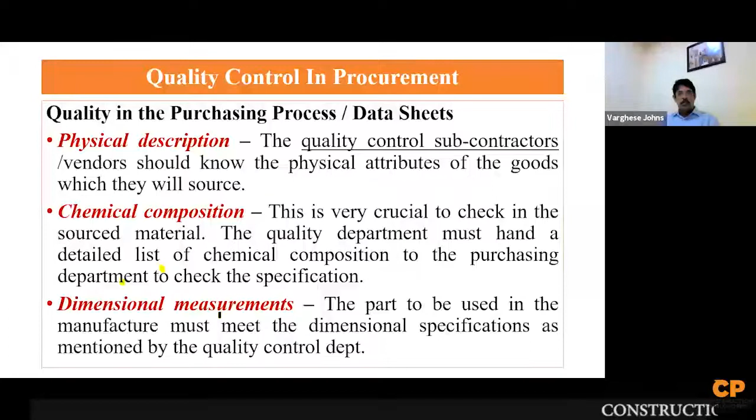Then chemical compositions, if you want to buy reinforcement or steel, what grade will you specify, what chemical composition, or maybe some other metal you are ordering, what is the chemical composition you are looking for? Then dimensional measurements and tolerances of the materials procured, continued performance specifications along with the material supplied, and industrial standards about that particular material. If you're buying steel or cement or something, you can see what the industrial standards are for that material, and you have to get a copy of that for documentation.

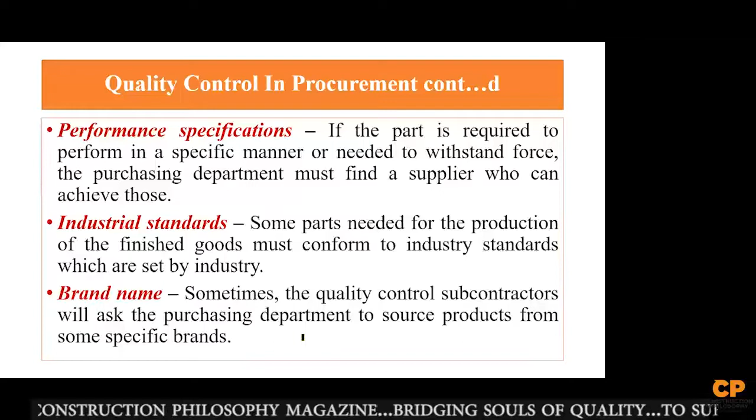Then brand name, sometimes you want this cement or that cement, you will always mention brand name because it is a confidence that will make you tell, or advise, or recommend using a brand name. Brand name is actually achieved or earned by companies over a period of time through their quality and their performance, so everybody knows that this particular brand is good.

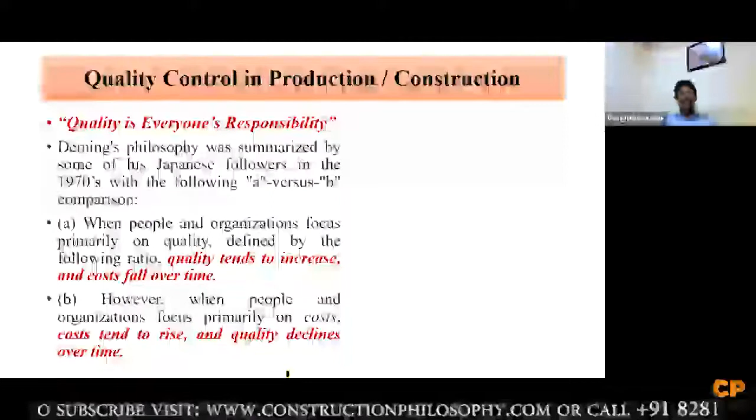Then quality control in production and construction. Quality is everyone's responsibility, that's how it is said. Deming's philosophy was summarized by the Japanese in the 1970s, with the following A versus B comparison: people and organizations focus primarily on quality defined by the following ratio. Quality tends to increase and cost falls over time.

If you improve your quality over a period of time, the cost will start reducing because there's no rectification, no repair works, no rejection - that cost is actually being recovered, or it becomes profit or revenue for you. And if you focus on cost instead, cost tends to rise and quality declines over a period of time, so it's the vice versa. Quality is the result of work effort over total cost. This is how we see it in production or construction.

The objective of inspection is to detect faulty raw materials, detect faulty products, and enable managers to take decisions by finding out weaknesses, discovering where we went wrong, and how to fix it - preventing substandard work from reaching the customer and reducing complaints. Because if you produce something with substandard work or processes, the customer is definitely going to complain about it. And at last, it promotes the reputation of quality and reliability of the product, because it is reliable if the quality is better.

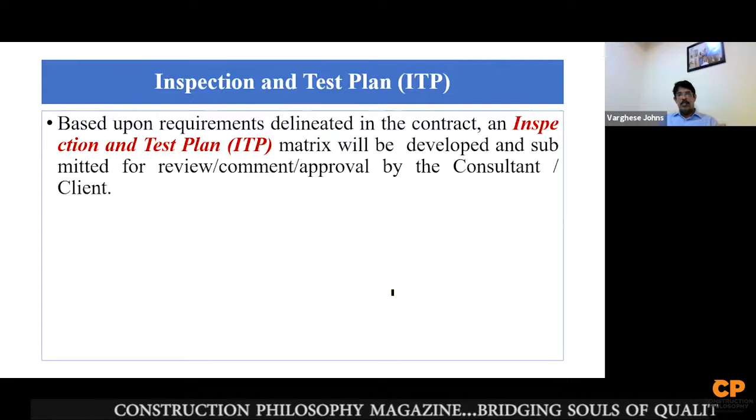This is something I don't want to explain too much - the ITP, inspection and test plan, which is prepared more for manufacturing and product manufacturing. In construction too, you have to submit in advance to the client how you are going to do your inspection and test plan, so you prepare something like that, a quality control plan. You have hold points, and everything is actually defined in this ITP document, which is defined this way.

The activity tells you what construction activities this ITP document consists of. The procedures tell you what construction procedures I will use. Checkpoints - where all I will check. Level of acceptance - what level, whether it's major, critical, or minor - you categorize it. Then DOC, the verifying document, inspection documents, and inspection by - meaning a qualified person did it. Then are there any requirements that need to be stated, documentation.

So that is the ITP - preventive actions and corrective actions are implemented in response to customer complaints. You have to do a corrective action because the customer complained about your product.

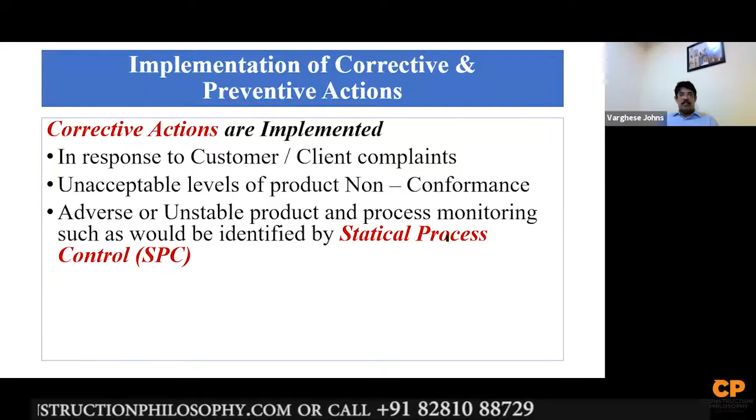So that is, there is a non-conformity. Then there is a preventive action, where you try to find the potential source of non-conformity and prevent it before the product goes out. To find out the corrective action, you can use statistical process control, SPC, which uses statistics a lot to study this kind of thing.

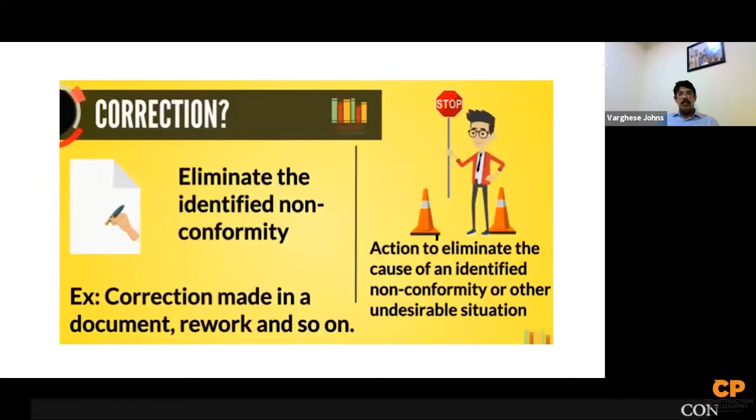Corrective action means action to eliminate the cause of an identified non-conformity or other undesirable situation. Correction means eliminate the identified non-conformity. Preventive action means action to eliminate the potential cause of an identified non-conformity or other undesirable situation.

Benefits of using quality control in production: increase customer loyalty, gain repeat business, gain new customers from referrals, maintain or improve your position in the market, improve safety, reduce liability risk, and contribute to overall positive branding of your product. So those are the benefits you can get.

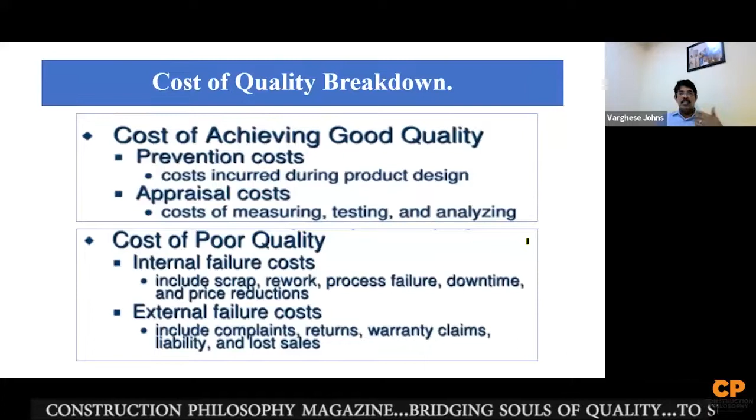Cost of achieving good quality includes prevention cost and appraisal cost. Cost of poor quality includes internal failures due to repair works, rework, downtime - things you have to pay for with poor quality. External failure happens when you supply material and get a return because it is not functioning well, leading to warranty claims, liability, and loss of business.

Quality circle, which we mentioned last time, is a way of capturing the creative and innovative power that lies within the workforce.

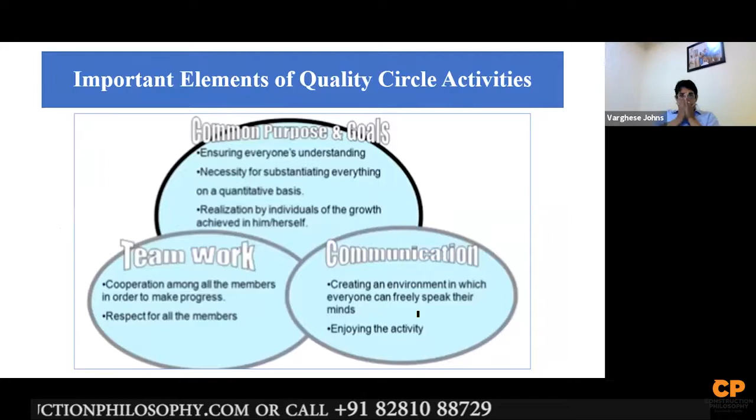So it's common purposes and goals, teamwork, and communication - how you communicate. Common purpose is like having a good leader. You need a good leader, someone who motivates all the people toward a common goal. That is a leader.

A manager is actually administration and controls everything, but a leader is not that. He works with them, he motivates people toward a common goal, and many people follow him - you have so many followers when you are a leader, not like a political leader.

Teamwork - so you do it in a team so that you will have better communication among the people, the team who is doing the job.

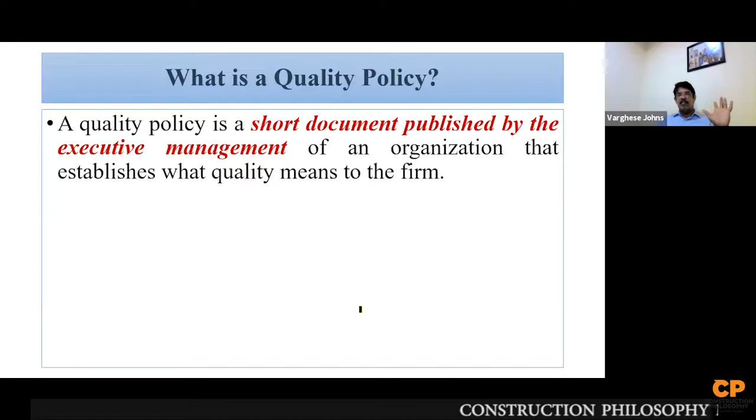What is a quality policy? If you enter an organization, you can see their quality policy displayed. It's a short document published by the executive management saying this is our policy, we are going to do this, we are going to stick to ISO 9000, and every problem we attend to according to what the policy statement says. It describes your business and your commitment to quality. This is from ISO 9001:2015 clause 5.2.

It includes your vision, mission, and core values - what is the company's vision and what is the company's mission. You display this and ask all your employees to memorize it, or see it and read it, so they know the company's objectives, strategies, and things.